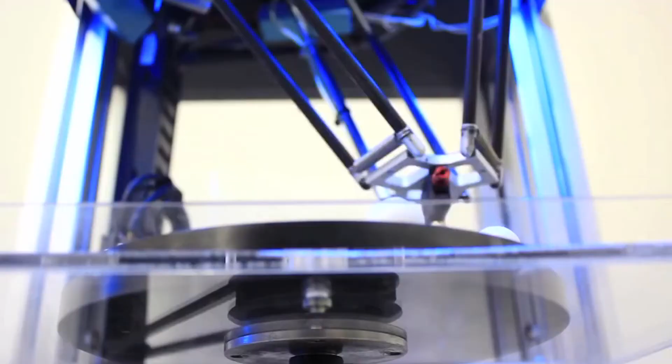Robots have an effect on our daily lives. Whether it is from the packaging of our foods or to the manufacturing of our medicines, there is no doubt that the robotics premise is widely used in several aspects of the industrial field. Robots are there to replace humans in repetitive work such as in assembly lines and packaging.

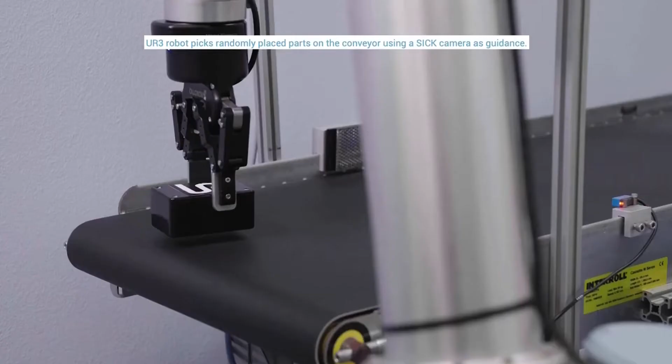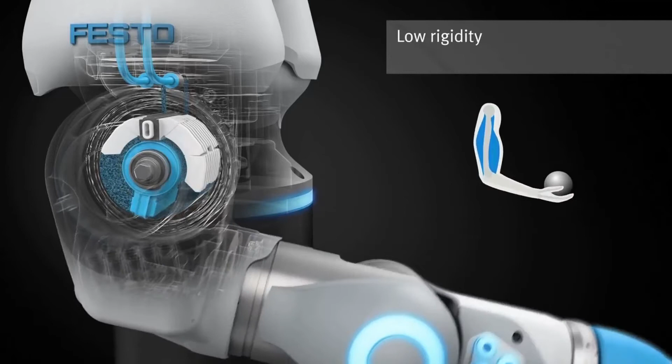One of the most common types of robots in the industrial field is a robotic arm. The robotic arm is used as it has a high resemblance to the actual human arm, which makes it a very useful design for a robot. Even though robots are mostly autonomous, there is still the aim of establishing a human-robot cooperative system.

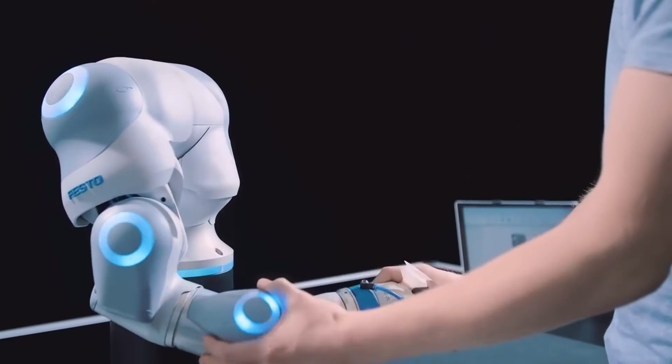One of the methods to achieve this is via the use of virtual reality. Virtual reality has the capability of being used in the industrial field as it is the new type of immersion that enables us to insert the user in a new world. In other words, it is the bridge between the real world and the virtual world.

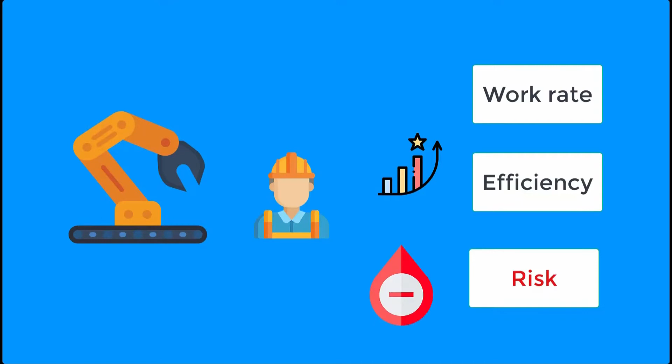While the aim towards the use of robots is to increase work rate, amplify efficiency, and reduce the risk on workers, human-robot collaboration is yet to reach a point to nullify work-related accidents. Locations such as nuclear power plants, ceramic factories, and vehicle painting booths impose a significant safety and health issue for any operator in their work area.

Situations like these guide our proposed solution towards a certain criterion, a criterion in which operations performed over a distance is necessary. Our solution to the problem revolves around the use of teleoperation alongside virtual reality to place the operators in a safe simulated work environment.

Additionally, AI will be used as to implement the self-aware technique on controlled robots. The integration of tele-operated control through virtual reality with AI may lead to an increase in human-robot collaboration significantly.

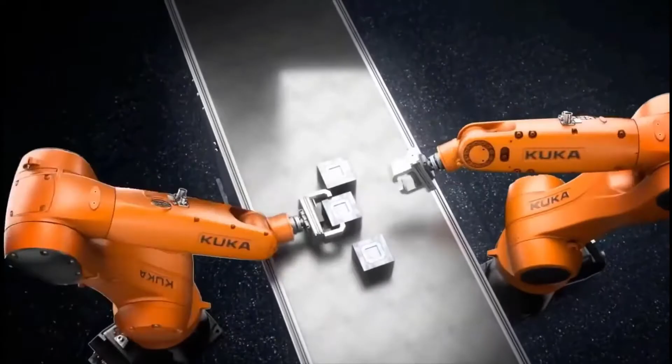Our project, we are using artificial intelligence to control our robotic arm and make it smarter, as an AI solution will lead to an increased control, resilience, quality, and time reduction.

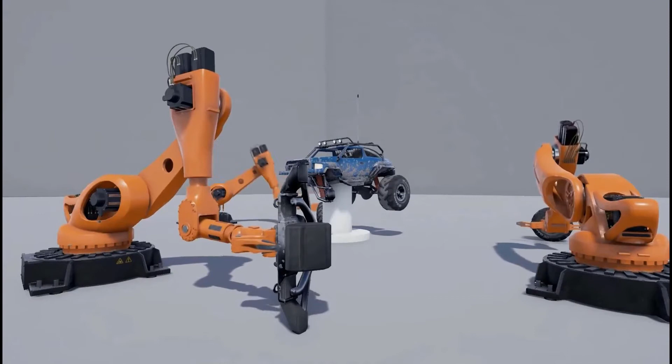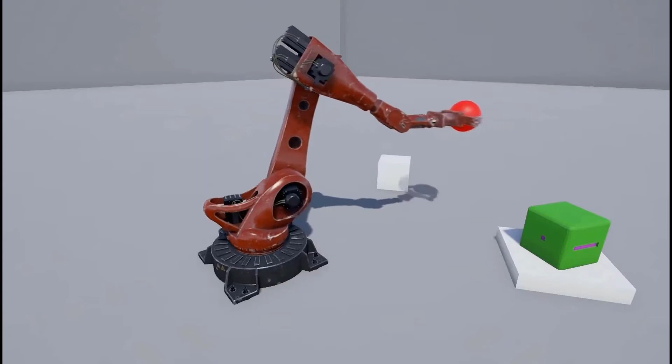Our aim here is to enable the robotic arm we are working on to create a self-image to itself, so that it can do three important and crucial tasks: adapting to different situations, handling new tasks, and finally detecting and adapting to physical damage or mechanical issues.

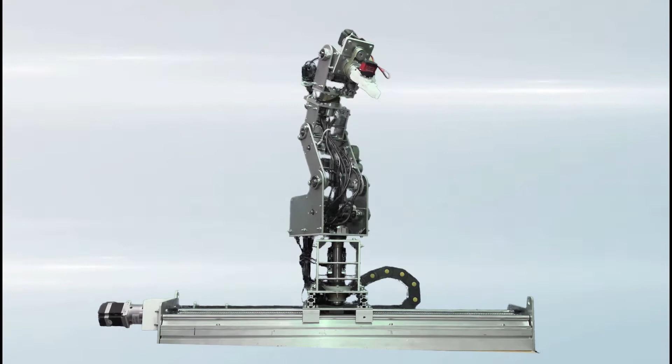Self-aware technique is something that we are striving for with our 7 degrees of freedom manipulator, to be able to adapt to any damage or change in the surrounding environment with zero prior knowledge of physics, geometry, or motor dynamics. Therefore, we focused on developing and creating much simpler AI systems like simple neural network.

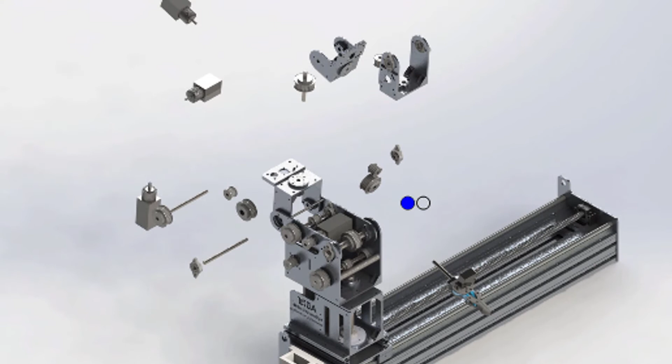Our solution is applied on a customized 7 degrees of freedom serial robotic arm. The robotic arm is made of assembled aluminum sheets to make it light in weight and much easier to assemble. The pulleys are made of aluminum as well, while the shafts are made of steel to withstand the high torque.

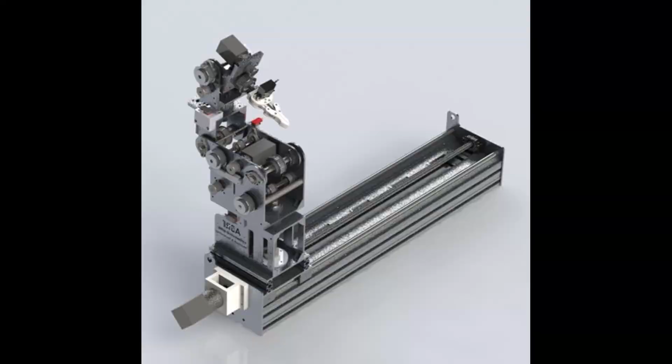The robotic arm has 7 joints actuated by means of 7 bipolar and closed-loop stepper motors, and each has a gearbox to increase the output torque. 6 of the joints are revolute, mounted on a prismatic joint to increase the workspace of the robot arm and make the robot arm much the same as robots in industrial workplaces.

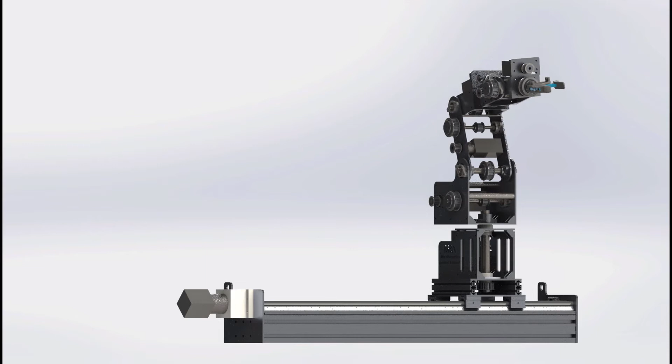The end effector of the robot arm is a gripper actuated by means of a servo motor for pick-and-place tasks. Our solution allows the robot arm to be operated in different workplaces, performing several tasks such as pick and place from a belt conveyor, welding, and assembling.

The goal of the deep neural network in our problem is to predict the joint's angle that will lead to achieve the desired pose of the end effector without any mathematical calculations. This problem is known as the inverse kinematics problem, and it is one of the main challenges in robotics control.

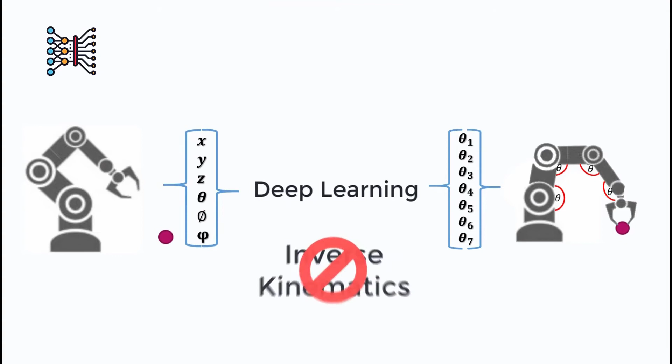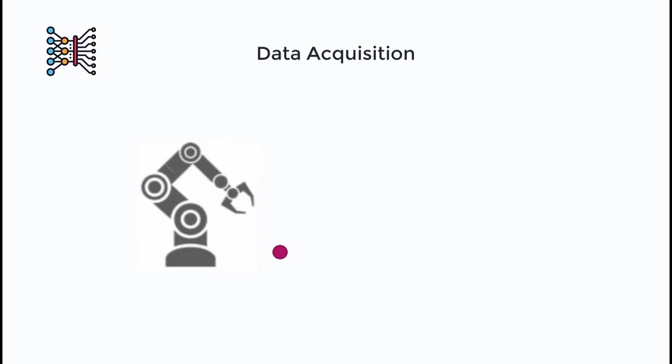In this stage, we have collected our training data from the simulation, but later the data will be collected from the hardware. In order to do that, we generated the workspace using forward kinematics. The very first step is training the FK and IK neural network using the generated datasets.

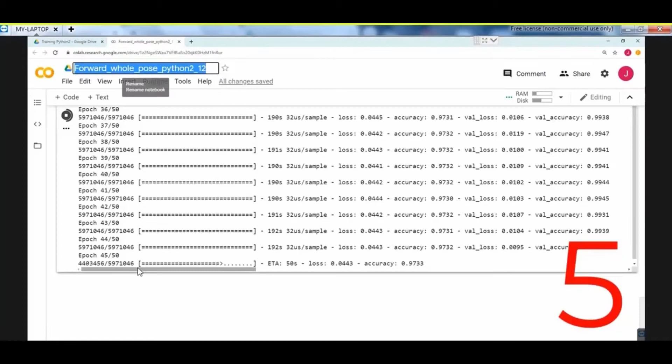The opposite is done in the IK neural networks. The training process was done iteratively using Google Colab servers. 16 accounts have been used in parallel to reduce the time. The second step is connecting the trained neural networks with the software and verifying the output of the neural networks.

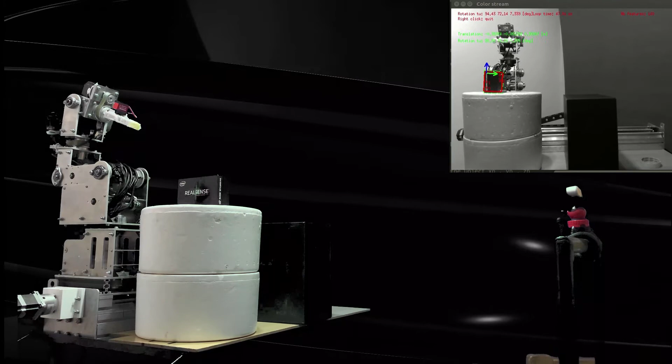Afterwards comes the stage of hardware implementation, in which we have used the neural network model to solve the IK problem for some poses. After calibrating the camera, we have implemented it in the system so that it provides the pose of the objects to the neural network model, and we have tested it as shown in the video.

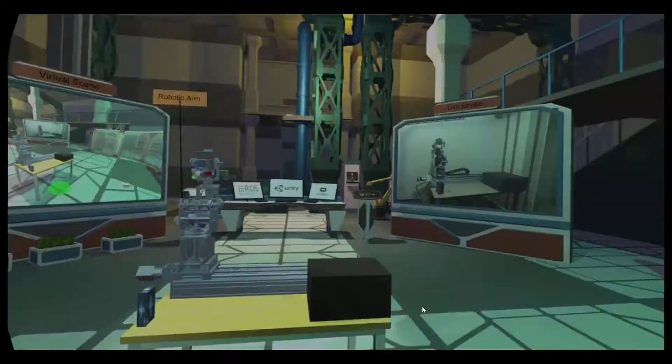Unity 3D is a popular free-to-use game and physics engine. It is mainly used to demonstrate 2D and 3D scenarios and gives the ability to custom make a virtual world to fit the user.

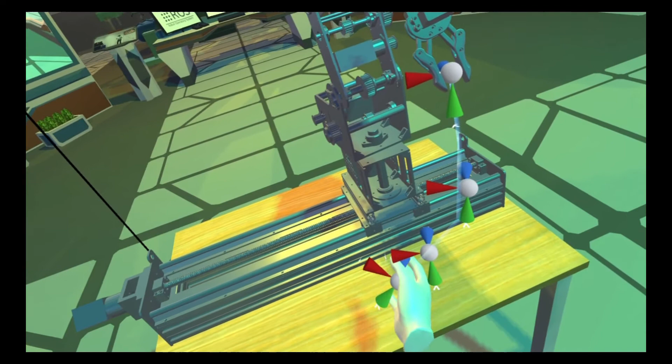Now shown is a demo of the path planning abilities of our system. The user interacts with a sphere that represents the coordinates of the end effector. The user moves the sphere, making the path desired for the robot to move along. This path consists of several point placements of the sphere, each with its own coordinates.

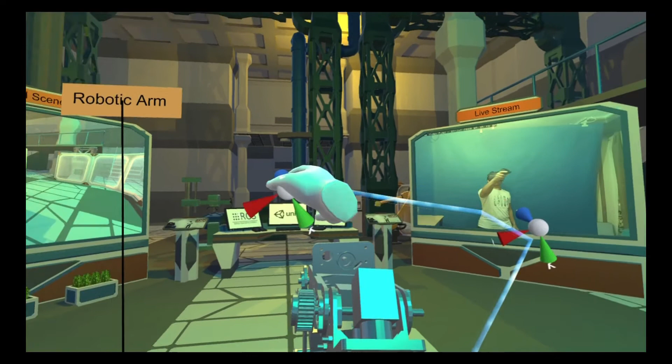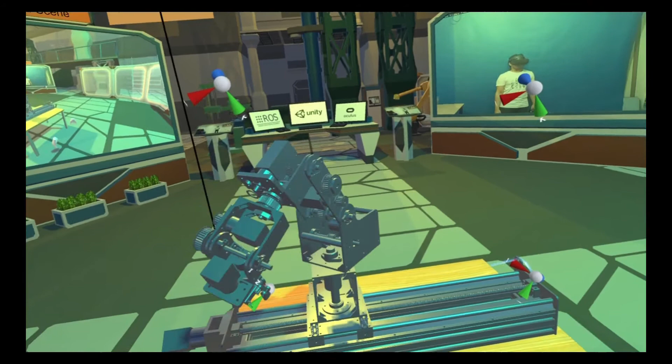The coordinates are then sent to ROS for kinematics calculations. After the calculations, the joint states of the robot are acquired and sent back to Unity. The user is then able to visualize the predicted motion of the hardware inside the virtual reality. The connection between Unity and ROS is via WebSocket protocol using the ROS# package. This allows the data transfer between the two platforms to operate fast and efficiently.

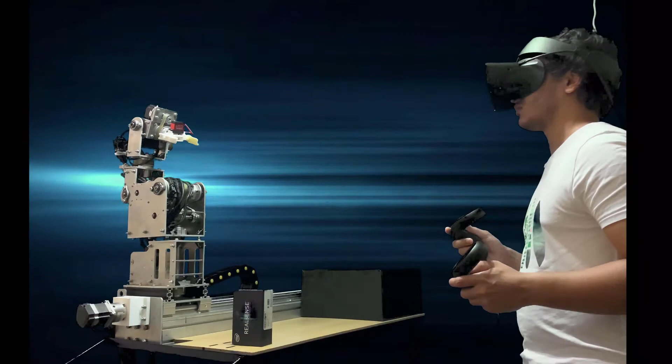Now shown is a demo of the pick and place task for our system. The user picked a box. The coordinates of the box are sent directly to ROS in order to calculate the joints and angles and updates them to Unity.

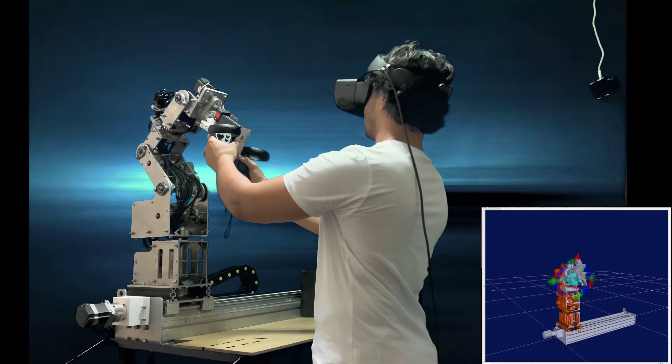When the end effector reaches the desired pose, it snaps to the box. The coordinate sphere appears. When the box snaps to the end effector, it sends a command to the gripper motor in the hardware to grasp the box, and then the user is able to use the coordinate sphere to make the desired path in order for the robot to follow.

This simulation is planned in the MoveIt Simulation tool in ROS and executed on the real hardware. The user uses the live stream in the virtual scene to check on the motion of the actual hardware.

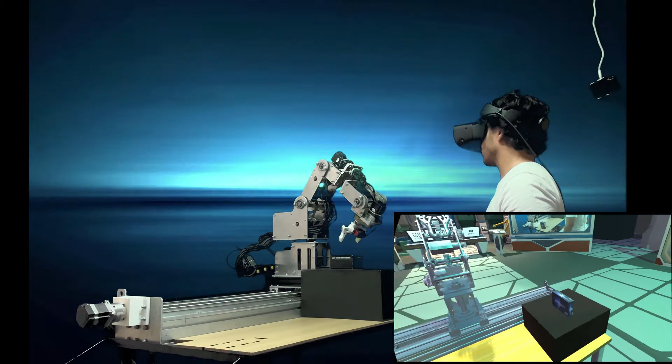The controllers are used to send commands for returning back to home position. From this demo, we represent the ability of the system where the virtual scene mimics the real one, while achieving higher accuracy and precision. These demos are a showcase for the use of VR in teleoperation and AI to solve for the kinematics.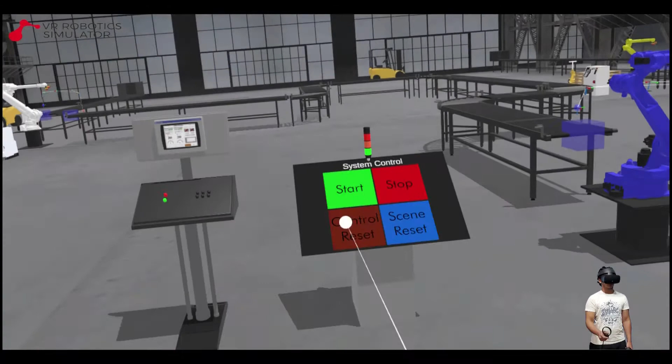Our product solves the problem of risk and harm in work environments by merging teleoperation with virtual reality and meshing artificial intelligence to enhance the automation level of robotics systems.

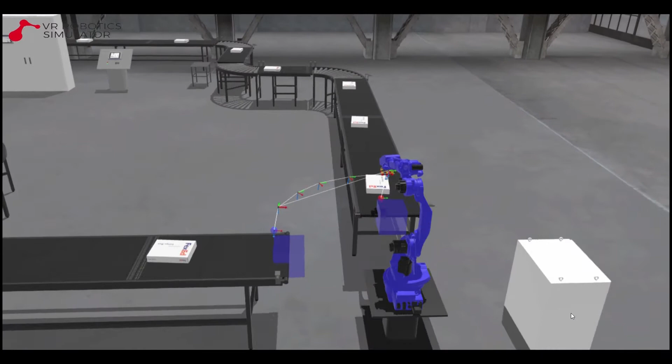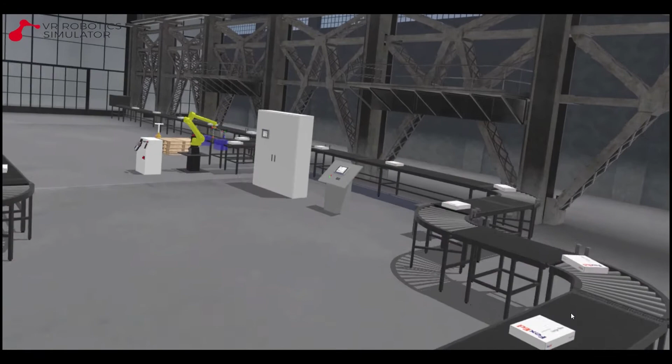Our vision and future work aim towards implementing a more cooperative solution. Cloud robotics is the integration of cloud platform tools and solutions with robotic systems, using Docker to improve our product usability and make it compact, flexible, and easily implemented on any system, and also improving the overall system goal when applied and accessed remotely from any device, anywhere.

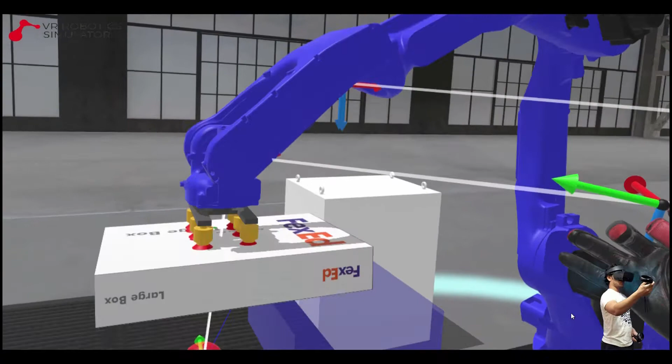We envision applying our system on a multi-user perspective to make it more collaborative and easily accessed. Applying our system in an industrial factory with increasing the number of accessible robots and giving the user the ability to customize the scene to his needs.

The simulator demonstrates some of our intended future improvements by customizing your scene according to your need and easily controlling and programming the robotics system in it.

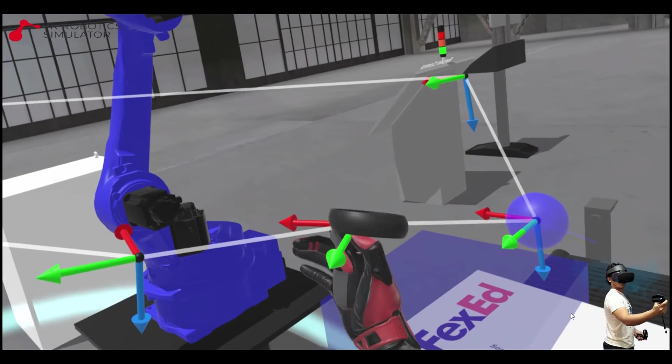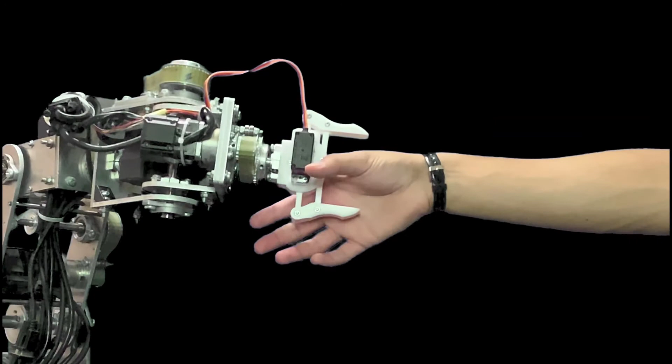With the world currently facing hardships, people look towards protecting their lives and their loved ones. For that, we thrive towards using human-robot collaboration to make our world a less harmful world, a much safer world.